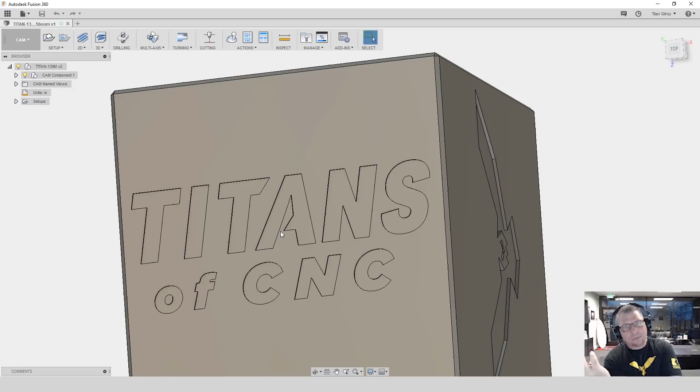So when I'm here, I'm gonna actually rotate exactly how I want it to rotate in the machine. I'm gonna flip it exactly how I wanna flip it in the machine, okay? I can talk about it, but let's just do it, okay? So first thing we're gonna do right here is we're gonna do a setup like anything else, okay?

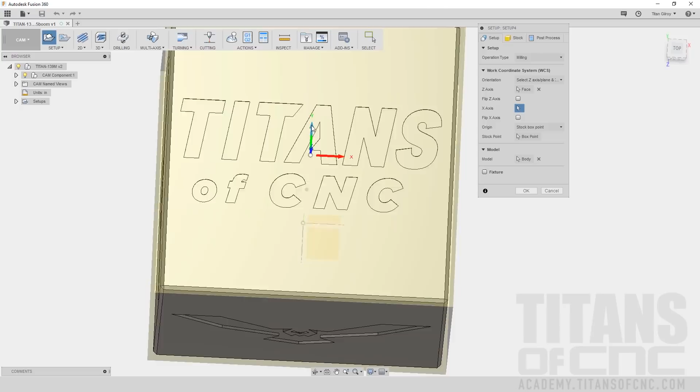So I'm gonna come up, I'm gonna actually set it up, I'm gonna come over, I'm going to say model orientation. I'm going to say Z and X. I'm going to hit Z. This is my surface. Hit that bad boy right there. Now X is already in the right direction. Y is in the right direction. So I'm good with that, okay? So I'm just going to leave that alone.

Actually, you know what? Maybe I'll just touch it, okay? So I'll say, okay, that's X right there. That's good. I'll flip this guy back around. And then I'm going to come back over here. I'm going to go model, box point, boom. It is absolutely in position already, so I'm already good. See that? Okay, so there's my X, Y, Z. That's where it's going to stay all the time.

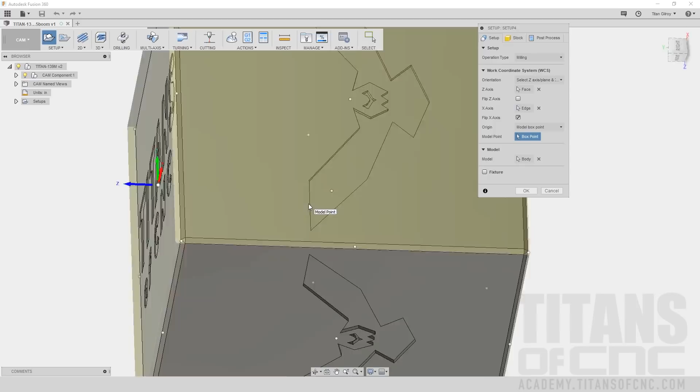And then when I flip it to do something else, I'm just going to tell it where the Z surface is changing. All right, so let me go back here. Now we're going to add the material. The material now is 3-inch diameter. So on a lot of 5-axis parts, a lot of people, they'll grab things with collets and grab them with chucks or 5-axis fixtures or something. So you can do square material, of course.

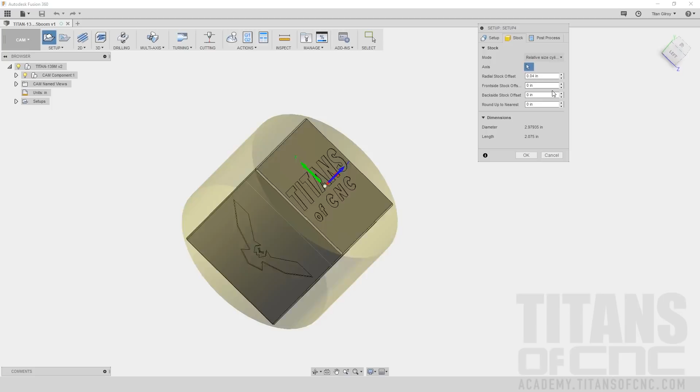On this one though, we actually designed it out of round material. And then we just pre-cut it for the bottom so we can grab it with that dovetail, okay? So I'm gonna come over here to stock. We're gonna go to relative size cylinder, boom. It automatically puts the cylinder on there, okay? So now I'm gonna say radial.

I'm looking at this diameter right here, right? And I'm almost there. And you have a little bit of extra material right here, right? A little bit of extra material right here, boom, boom. And when thinking about how much material that actually is, this is a .025 chamfer per the print, right? And so I can see that's 25. So if it's right there, I just have a little bit more, okay?

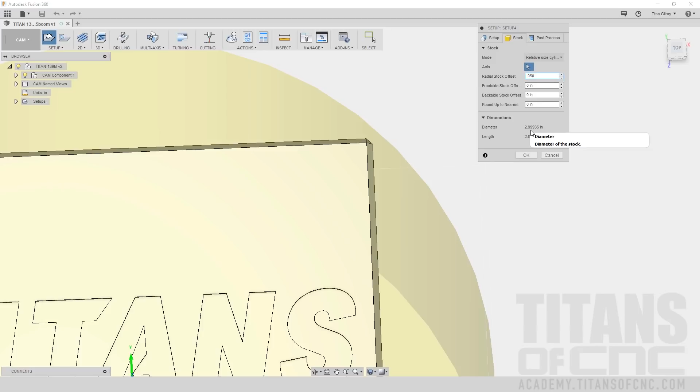So I'm actually going to go 0.050. Boom, and I'm pretty much right there. I'm actually gonna go over, so see right there? So I just went over 3 inches right there, so my material is absolutely perfect, all right? So on my front of it, when you flip it here, you can double check where your front is. If I put 0.05, you can see it go right there.

Like, I'll change it. I'll go 0.5. See how it just did that? All right, so I know I'm in the right place. So I'm just gonna say 0.05. You know, whether you have 5 or 100 thousandths, it doesn't matter too much. Actually, it matters because we're not gonna do a roughing pass. We're just gonna come back and clean it, okay?

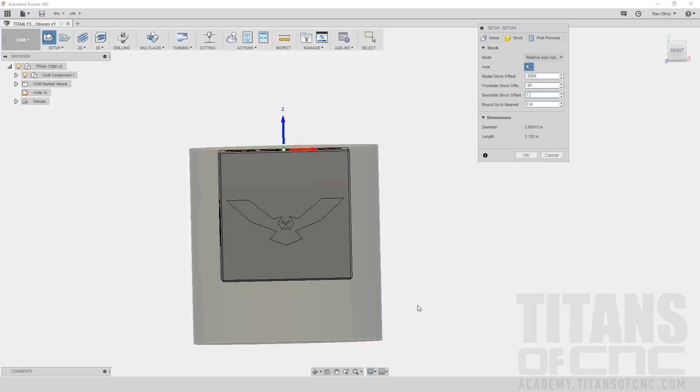So on the back side, I'm gonna give myself a lot of material. So I'm gonna actually go 1 inch back here because this is where I'm holding the part, and I wanna make sure that I have some clearance from the jaws that are holding it, so when I come down from the side, I don't hit anything, all right? So that all looks good. I like it. I'm gonna okay it. Boom. That's our setup right there.

Looks beautiful. Okay, so what's the first thing that we're gonna do? Just like any other part, we're gonna actually use a 3-inch Stellram, Kennametal Stellram. We're gonna just face it right across. We know that right here, this diameter is 3 inches, and the part is literally only 2.075 inches. So all we got to do is just come right across it, okay?

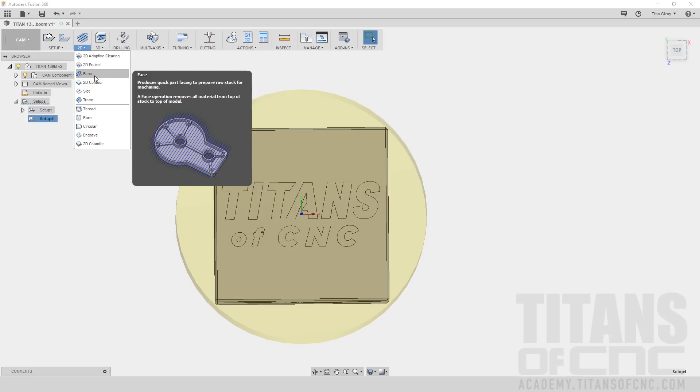So I'm going to come up here. I'm going to go 2D. I'm going to say face. I'm going to go select. I'm going to come down over here, and I'm going to go into my building blocks, tool list. I'm going to drop down. I'm going to grab my Stellram right there. I'm going to hit OK. Now we're on 5 axis. So before I was going really slow, but I'm going a little bit faster, okay?

So I'm actually going to run it, say 8,000, okay? So I'm going to go 8,000 RPMs. Boom. I'm going to say 60 inches a minute. All right. 60, 60, 60. I'm going to say 200 right here. Boom, all the way down. I'm going to come up here.

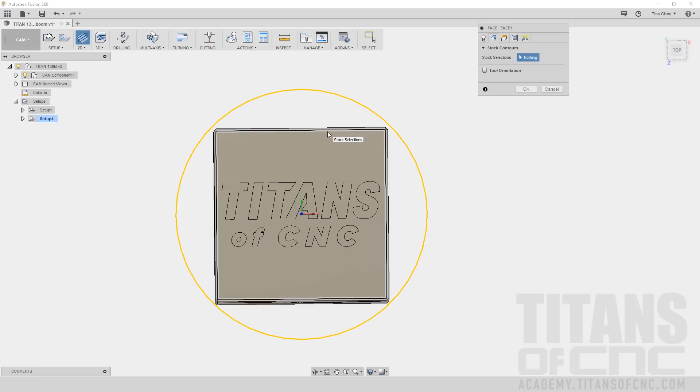I'm going to hit this guy, and it's telling me nothing because it knows this, but I'm actually going to change it because it's a 3-inch, and I don't want the 3-inch to come over here and come down and come across, trying to face all this material. So I'm going to actually just grab this guy right here, maybe the outside, and I'm going to say that's what I'm facing, all right? And then that'll be good. So then I'm going to come over here, and I'm going to say model top, we're good. Model top, 0 and 0.

That all looks good. Because we're a 5 axis, I think I want to practice getting away from the material a little bit. Okay, so on the clearance, let's go to 1 inch on these two right here, just to make sure that we keep away from the material. And we'll leave these alone. So I'm going to come back over here. That all looks good, but pass extension, we have like 1/2 inch material over here and 1/2 inch material over here, right? So I'm going to say 2.1.

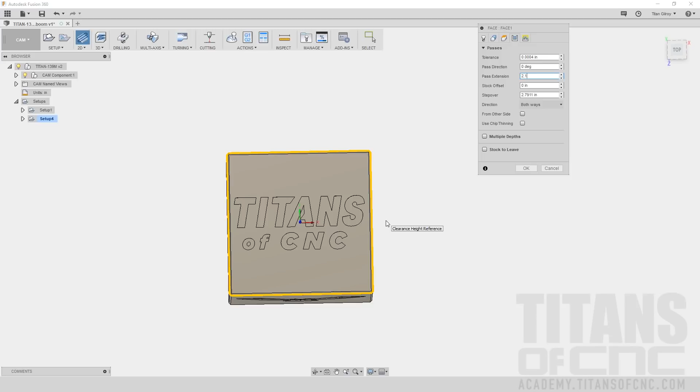Actually, I'm going to come back over here. I'm going to turn these guys off. I'm going to turn this off. Okay. And I'm going to say okay. Boom. All right. So if I turn my material on, like right here, and look at it, actually, let me just double check it. So I'm gonna drop down. I'm gonna simulate it. I'm gonna say okay. Boom. Now I can see I clearly come off the material. It leaves this a little bit, but it's only 50 thousandths, right? So see that little bit of stock right there? I'm not even gonna worry about it. All right.

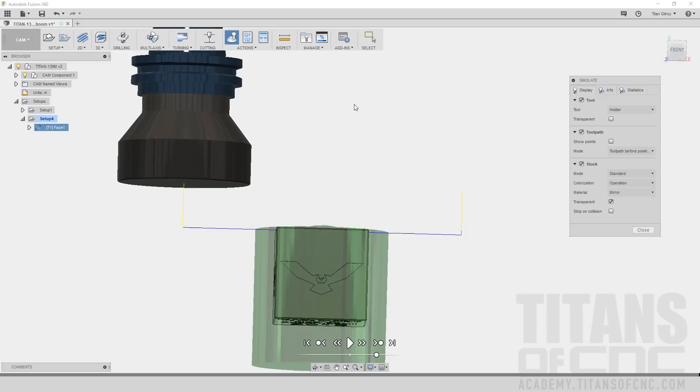And we're beautiful. One thing I'll say is I'm just weird like that. That is no problem, but I just like to start left to right. It's just what I like to do, okay? So I'm actually gonna come back in here. I'm gonna edit this guy. Boom. I'm gonna come back over here. Right here, it says degrees, pass. I'm gonna actually say 180. Boom. Then I'm going to say okay.

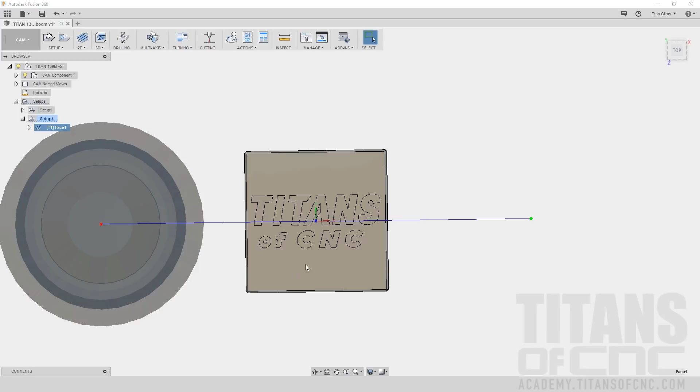All right, so the first pass is finished. It's going to drop down, come across, lift up, boom. Okay. I'm looking down at the spindle right here, straight down. Now I'm going to rotate this way. Rotate to my left. I'm going to come down. I'm going to drop down 90 degrees.

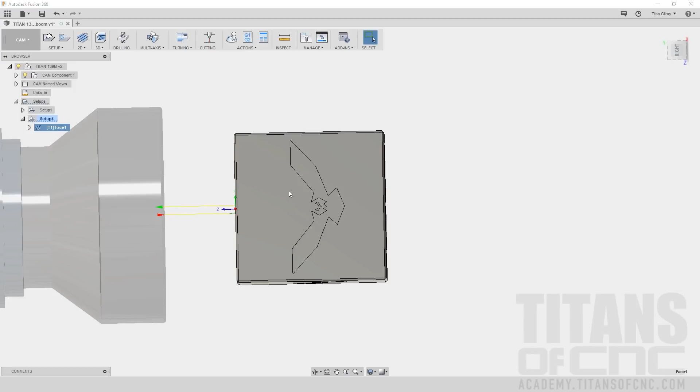Okay. Now, this face mill, if I just face it, it's going to center itself on this part. So I'm going to do something just a little bit different. I want to tell it exactly where to go and how to do it. If I hit face mill, it's going to center it, right? So what I'm going to do is I'm just going to use a contour, and I'm going to contour it, all right? But to contour it, I have to prepare it, okay?

So the first thing I'm going to do, because I'm on this side and I'm going to be flipping on this side, I'm going to actually sketch a line right here, okay? So I'm here, I'm flipping down. I'm just going to come up here. I'm going to go back to model. Okay. Now I'm just going to hit L for line. I'm going to hit this surface right here.

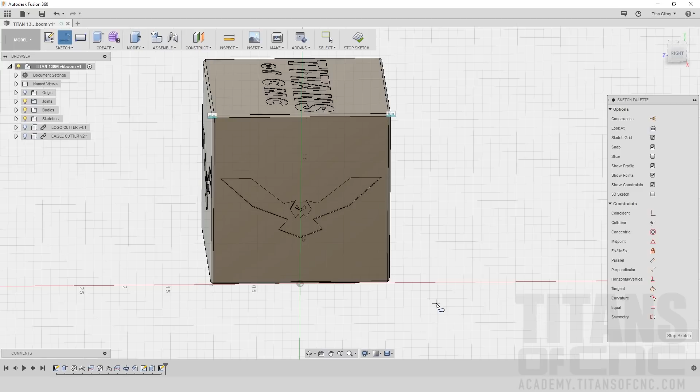Okay. I'm going to actually double check, make sure I know where I'm at, right? So I looked, that's where I'm at. So my line's going to be right here. Okay. So I'm just going to hit this guy again. Now I'm just going to come over here and I'm just going to stretch a line right there. Okay. Now I'm going to hit D for dimension. And then I'm going to take this guy here, this one, to this guy.

And since I have a 3-inch face mill and I want to have it come across the part, 1.5 would be the edge. I have a little bit extra material, so just to be safe, 1.8. Okay? And I'm just going to enter it. I'm already in D right here, so I'm going to hit this guy right here. I'm going to hit this guy. I'm going to come over here. I'm going to say 1.8. Enter. All right?

Now, I'm going to hit this guy. My tool is right here and it's facing across, okay? So I actually want this to be 200 thousandths right here. So I'm gonna hit here and then I'm gonna hit here. I'm gonna stretch it. I'm gonna say 0.2, all right? And I'm gonna enter it. Now, what did I do? I created a line to contour. So I, as the machinist, am dictating how I actually want to machine this part.

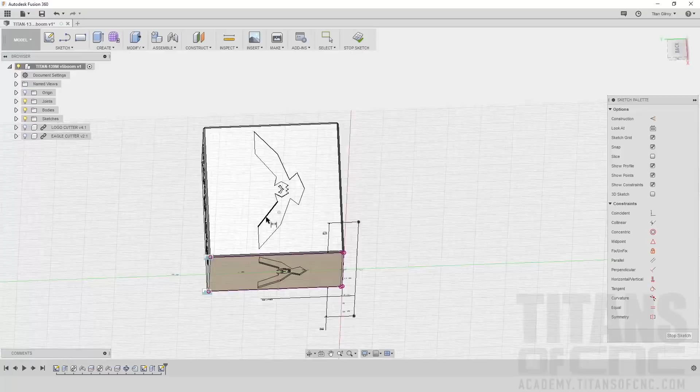Okay. So 200 thousandths right here, 1.8, 1.8 clearance. Everything looks good. And then I'm going to actually come over here now, and I'm going to do a line on this surface also. So I'm going to repeat the process, okay? So I'm going to say stop sketch. I'm going to come up here. I'm going to actually just hit line again, L. I'm going to actually hit this guy. Now I'm coming right across here, okay?

So I'm going to come back here. I'm going to actually come down here. All right. Now I'm going to hit D for dimension. I'm going to hit this guy right here, to here, to there. 1.8. Enter. Then I'm going to hit this guy over here, to here. 1.8. Enter. Then I'm going to hit this guy right here.

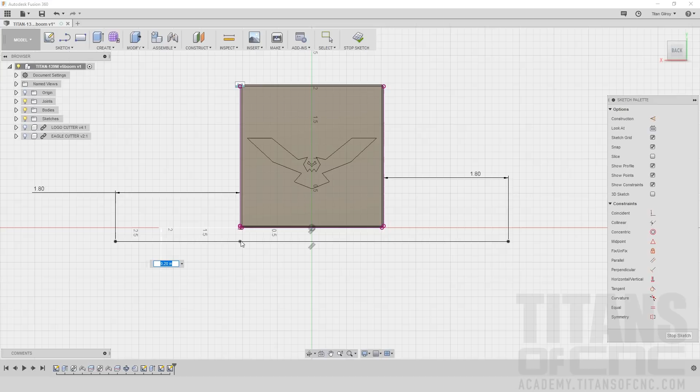It's already at 200 because it saw this over here. All right, so I'm just gonna hit OK. Right there. And that looks perfect. So now I'm gonna hit stop sketch. I'm going to come back up here. I'm going to hit CAM.

All right, this is red right here, right? Because I went out and I came back in. So all I have to do is right click over here. I have to say generate toolpath. And it fixes itself. All right. Now check this out. I got these two lines right here. Why did I only do 2 lines and I didn't do lines all the way over here? The reason is because I can use the same line. It just doesn't even matter. So when I'm here, I can actually use this line.

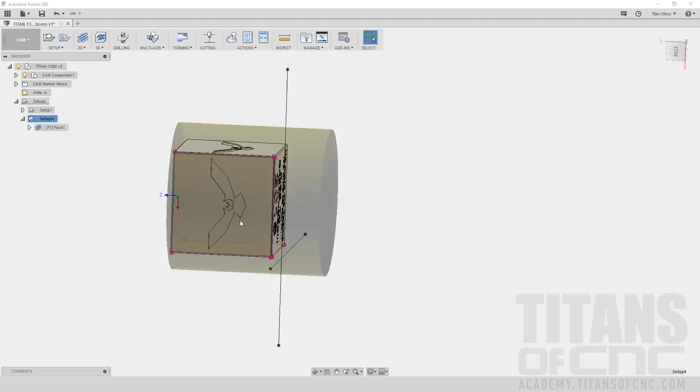I'm just going to say this is my surface. And when I flip over here, I'm going to use the same line because they're perfect to each other. Okay, this side, I just have to say what my Z surface is. That's just something really cool about working with solid models and working with Fusion 360. Makes it super easy.

All right, so now I'm here. I'm flipping down here. So I'm going to come up here. I'm going to go 2D contour. Boom. Now it already has my speeds and feeds right here. I'm just going to leave it alone. Okay. I'm going to come up here. Boom. This section is the most important section right here. It's the difference between 3-axis and 5-axis or 3+2, right?

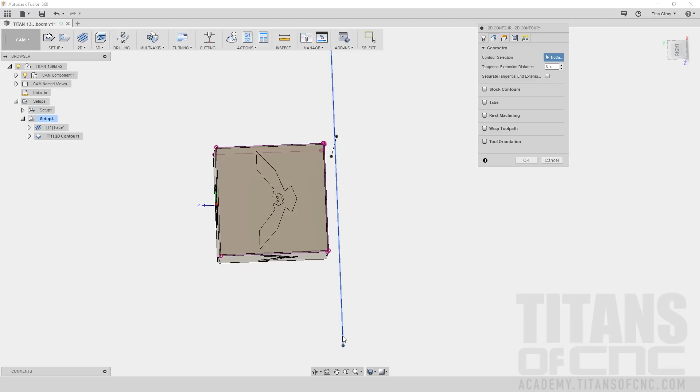Because now I'm going to select the line here. Boom. I'm going in the right direction, right? But you can see this is over here. That's kind of weird. So what do I have to do? I drop all the way down, tool orientation. That is the bad boy. That is what is going to set the machine in dynamic offsetting so the machine knows where to go.

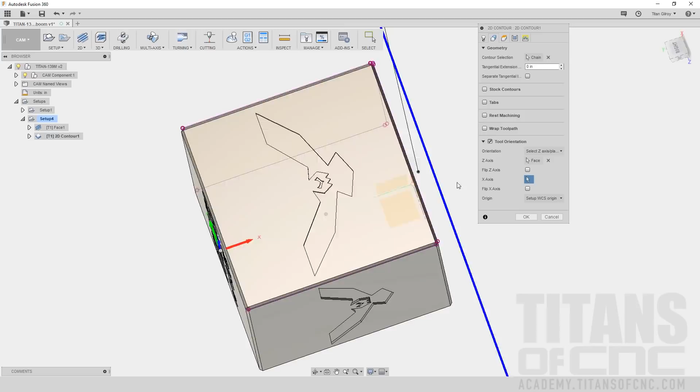Okay, so see this over here? You have to change this because now we're up here in X. Okay, so I'm going to hit this guy right here. And then I'm going to hit this guy. Boom. And it just changed. Okay, now X is still the same. X is going this way, Y is going that way, right? So I flip down, the 0 is still right there. X is positive that way, Y is positive, so it knows right where it's at. And when it posts, it's going to be perfect.

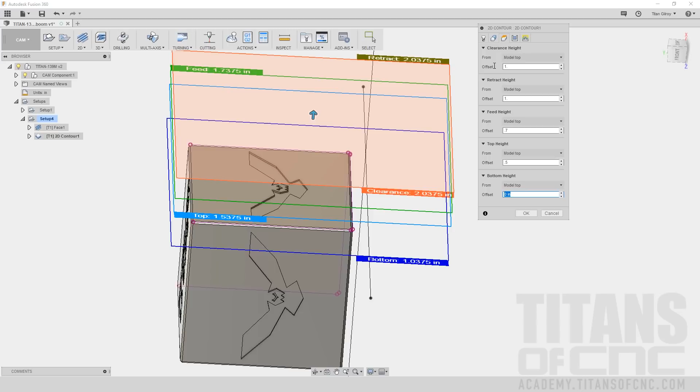All right, so now I'm going to come up here, click this guy. Now, we know that we have just less than 500 thousandths of material right here. So I'm going to actually do something. I'm going to come up here. I'm going to do 1 inch. I'm going to do 1 inch. Now right here, I'm going to actually change this, right? I'm going to say 0.7 right here, feeding. Model top, I'm going to say 0.5 for that material. Then I'm going to keep this at 0. It's going to actually make the cuts right here.

Okay, so I'm going to come over here. I'm going to leave it left in computer. I'm just going to leave it at 60 right there. I'm going to come down. I'm going to hit multiple depths. Boom. Maximum roughing, I'm going to go 0.1. I'm going to hit this guy right here. Finish step downs 1. Finish step down 0.005. And then I'm going to come up here. It says repeat finish, finish feed rate, multiple finish passes. I'm going to leave all that alone. I'm doing a finish pass right here.

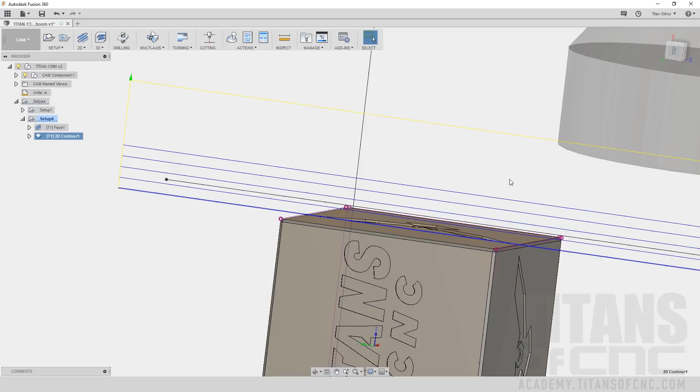I'm going to come up here. I'm dropping down outside the material. So all this doesn't even matter too much. So I'm just going to say, okay, I'm going to hit that guy. I'm going to hit that guy. I'm going to hit this guy. Boom. Check it out. So my feed rate is nice and slow. If I was actually doing this as a real part, I would speed these guys up. I'd have everything going fast, like a couple 100 inches a minute or even more. And then on my finish, I would have went just slow over here, but I'm just leaving it all at 60 inches a minute.

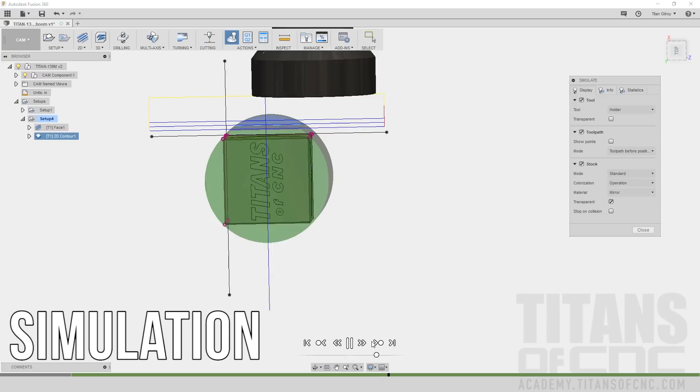All right. So that looks beautiful right there. You guys want to see it? Okay, let's come over here. Let's come up here. I'm going to drop down. I'm going to simulate. I'm going to hit OK. You can see it going. Boom. Boom. Boom. Looks perfect. Let's take my time.

Now, I made that line. See how the tool is offset? See that? It's offset to the side. It's 200 thousandths right here because I know my vise is over here and I want to keep my tool away from my vise, and it has a 30 thousandths little corner radius right there. So basically I determined as a programmer that I wanted to keep it 200 thousandths off the part, and you can see this huge amount over here. So over here is 200 thousandths, but over here there's a big gap. All right, so it's doing exactly what I wanted to do.

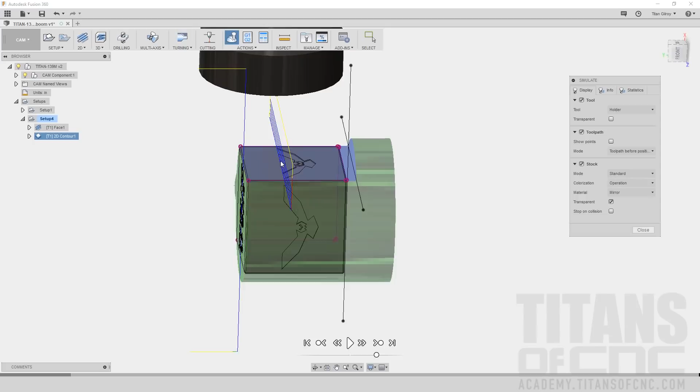And you see the tool path is offset off center. Okay, so that looks perfect. Now we just need to duplicate it. All right, and how I do it right now matters. Okay, so what I'm going to do is I'm going to close this.

I'm going to right click here. I need to do it 3 more times. Okay, so I'm going to hit duplicate. Boom. I'm going to right click again. I'm going to say duplicate. Boom. Now I'm going to right click again. I'm going to say duplicate. Boom. So they're all doing the same thing, but now which way do I want to rotate?

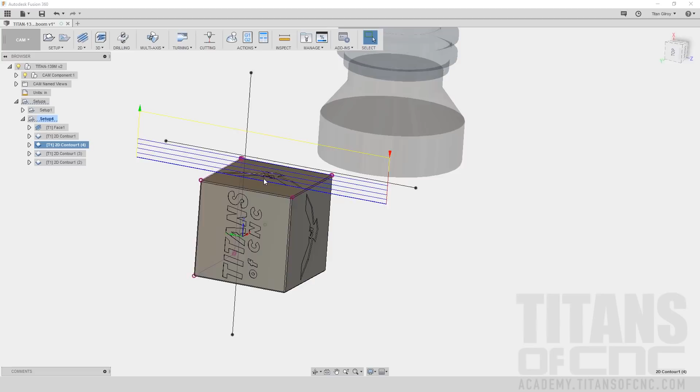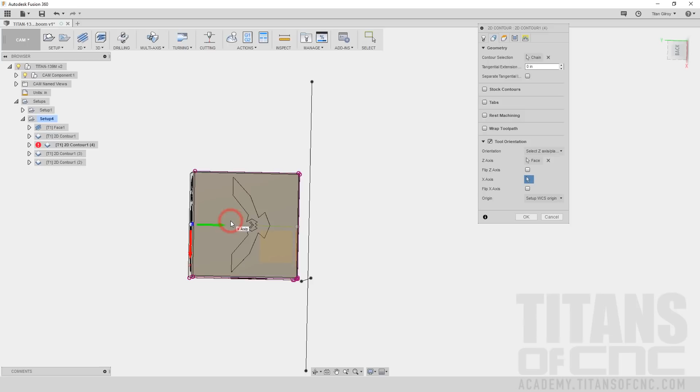So I think I'm going to actually rotate this way. Okay. So we're here. I'm going to flip this way. That's my next one. Okay. So second one, I'm going to right click, I'm going to edit. Now watch this. I'm going to come over here. Boom. Now I'm going to X out here. I'm going to pick this guy right here. Now that's Z surface, but look, my Y's off.

So then on my X, I'm going to hit this guy. Come in, show you guys. Boom. Now X is in the positive direction. All right, makes sense? Now this looks good, everything looks good. Now I'm going to click this guy. So here, I'm going to click this one. Boom. It knows where it's at. I click that guy right there. Now I'm going to come over here. It's all exactly the same, so I'm just going to hit OK. Boom. And it does it.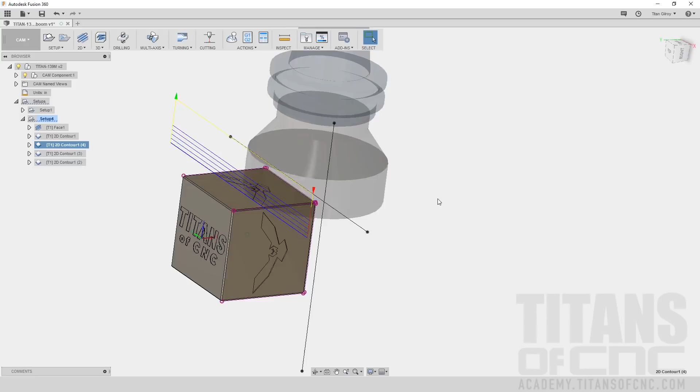Now, the next one has to be this one. Boom. So I'm actually going to edit this. Okay. I'm going to come in here. Boom. I'm going to get rid of this. I'm going to hit this. All right. I'm going to get rid of this. I'm going to actually hit this. And it's opposite. So I'm going to click this little arrow right here. Boom. Now I'm going to OK it. Now it's going to do it. Okay, so let me just double check it. So it goes from here to here to here.

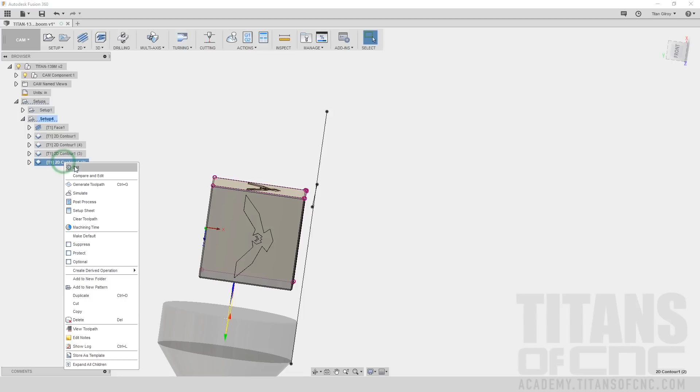Now I want this side. So I'm just going to change it here. Edit. Okay. Come back over here. Now my chain has to be here. Now my face needs to be here. This is in the wrong direction, so I'm going to actually X. I'm going to come over here. Boom. Double check this. X is correct. Z is correct. Y is correct. All right. And I'm going to change this guy right here.

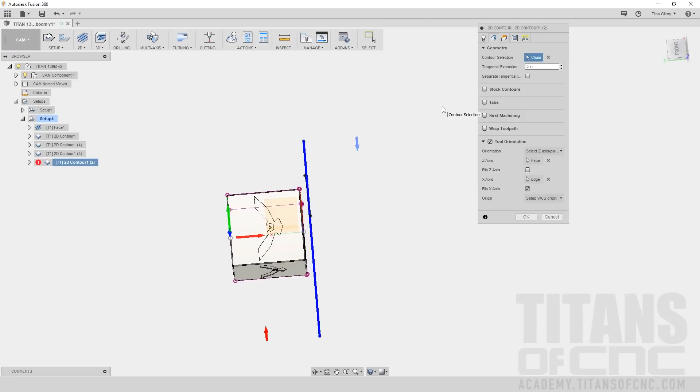Click this guy. Boom. Now I'm going to click this guy. Boom. All right, so now let's look at it this way. Face, boom, boom, boom, boom. See it? And that is perfect. All right, so one tool, our face mill, just rocked it all the way around. Guess what? We're only doing 2 tools.

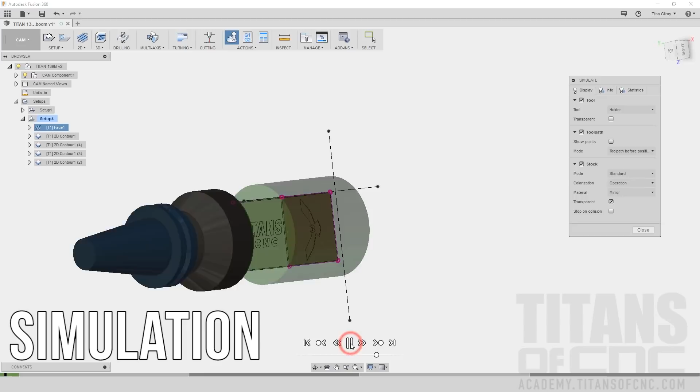All right, so I'm going to show you that tool real quick. So we're going to right click it. I'm going to drop down. I'm going to simulate. Boom. Say OK. I'm going to look at my material. I'm going to actually get rid of transparent. I'll speed it up. Just making sure that everything looks good. All right, so that's how our part looks right now. Okay, pretty cool, pretty awesome. All right, so now I'm going to actually close this out. All right, so the part looks absolutely perfect. We walked all the way around it.

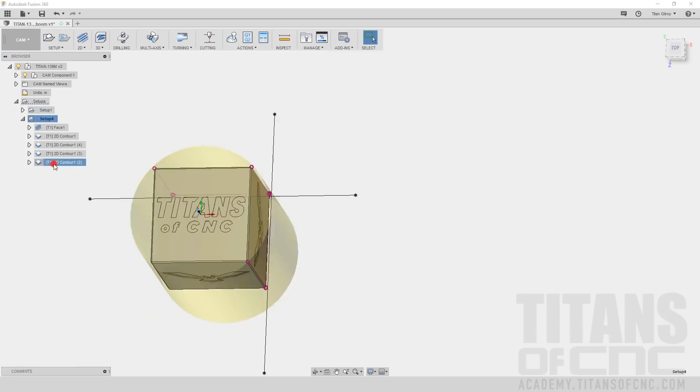Our first tool was a Kennametal steel ram, a beast of a tool, and it basically just cleaned everything up around it. Now we're gonna do the intricate work. We're gonna actually do the engraving and the chamfers. And when we do the chamfers, I'm gonna teach you something pretty cool. So on the first tool, I literally showed you how to keep changing your Z so that it always knows where the spindle is, right? And it's just gonna keep orientating itself, meaning the 5-axis trunnion is going to move depending on where you say the Z is.

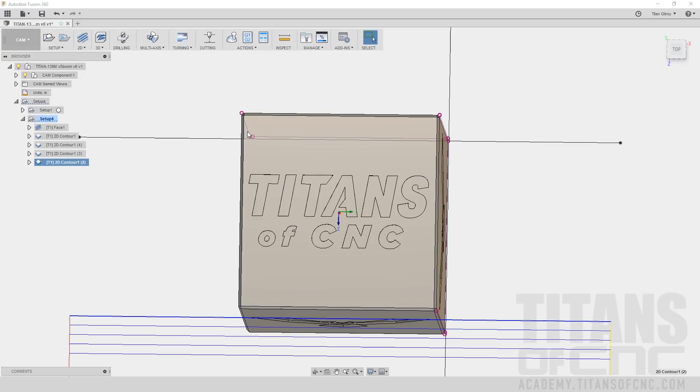So on the next tool, I'm gonna teach you a high-end cool little trick. So we're going to engrave it. We're gonna chamfer around here, right? That's gonna be step 1. Then we're gonna flip it on its side. We're gonna chamfer just here, and then we're gonna engrave here, and then we're gonna copy and basically do it 4 times, going around the outside of the part, finishing the part in record time, fast and efficient, because that's the name of the game. All right, enough talk. Let's get to some action. So the very next thing we're gonna do is we're going to engrave this guy right here.

So I'm gonna actually double check something. All right, so I'm gonna actually come up here. I like to turn things off and on to double check tool paths and stuff, and that's why I kind of dropped it down, but you'll see how I do it in a little bit.

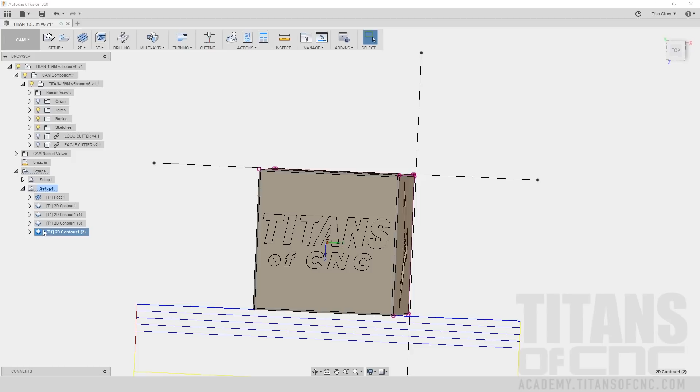Okay, so first thing I'm gonna do right now is I'm gonna come up, I'm gonna go to trace. So I'm gonna hit trace, I'm gonna come up here, I'm gonna go to Titan building blocks, go off the Titan building block kit, right? The Academy kit. And when I come up here, I see a 1/4 inch chamfer. I'm gonna actually use that to engrave and chamfer. Same tool, multi-purpose. I'm gonna hit that bad boy.

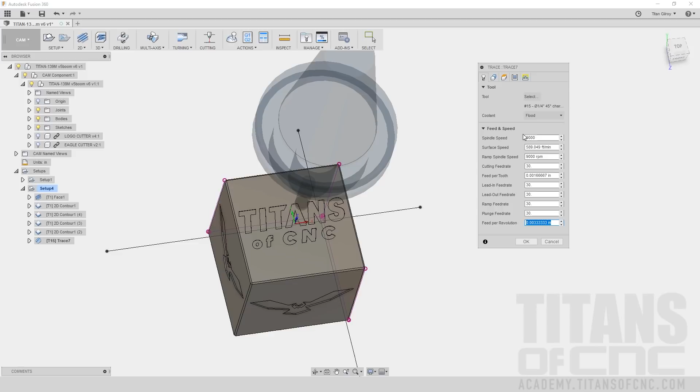I'm gonna come up here to 9,000. It's gonna go nice and slow. I'm just gonna do 1 pass because I wanna make it nice and simple. You guys can double up your passes, do finish passes. You can speed up the roughing, slow it down. Engraving, with this tool, is not something you want to speed through. So I'm just going to keep it nice and slow. All right, so 9,000, all the way down.

I'm going to come up here. We're going to select our text. Okay, so I'm going to get nice and close to make sure that I don't hit the bottom and I only hit the top. All right, so I'm going to come up here. I'm gonna hit this guy. Oh, right there, all right. So then I'm gonna hit this guy. I'm gonna come in, zoom in, hit that guy, hit this guy. See how it's kind of like right there, you gotta be careful. So just get in there.

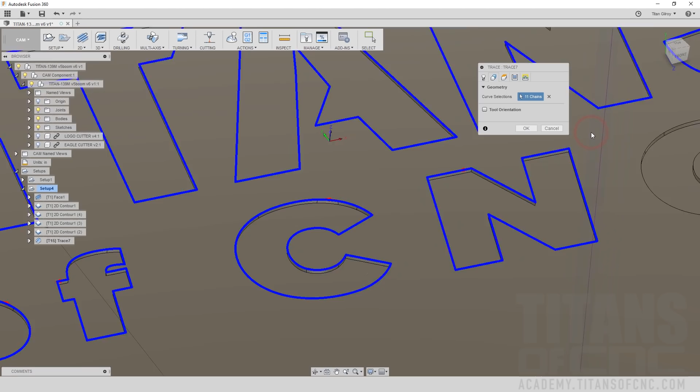All right, so I got all my lines, I got my circles. You wanna just double check and make sure that you have absolutely everything done. All right, so now everything's good. I'm gonna go to tool orientation. All right, automatically I can see that my Z is off, so then I just hit Z, right there. Y is perfect, X is perfect, everything looks good. I'm gonna come over here, just gonna go 1 inch, 0.1, and then right here, I'm gonna actually say 0, model top, this has to be model top. Right here, I'm gonna go model top.

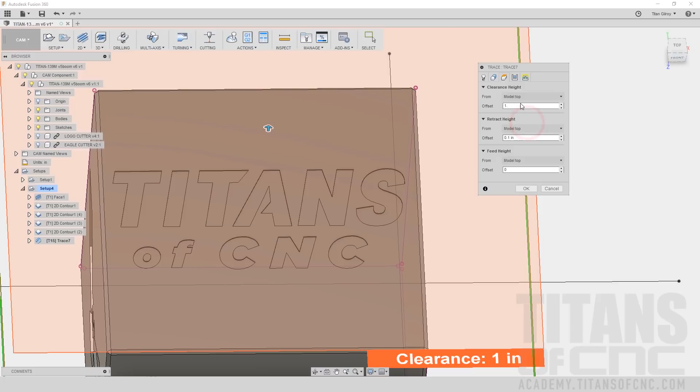So 1.10, I'm gonna actually come over here, okay? And I'm gonna drop down, center, center, axial depth. I'm tracing, so I actually wanna drop axial, my Z, down into the part. So I'm going negative 0.010, okay? I'm gonna get rid of my chamfer because it doesn't matter. These all look good. I'm gonna okay it.

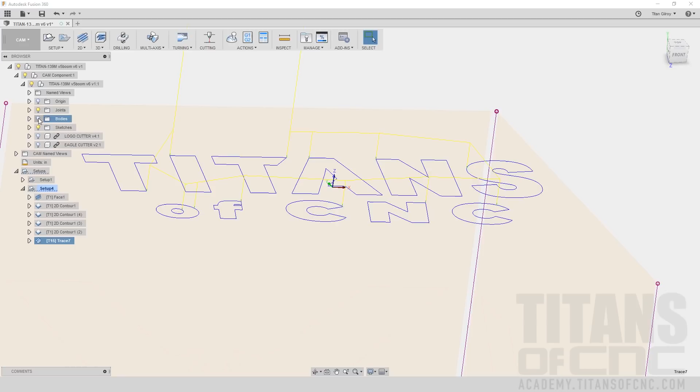All right, so that looks good to me, but I have to double check and make sure everything's good. So watch, I'm gonna come over here. I'm gonna actually turn this off and I can see it, okay? So I read it, Titans of CNC. Looks good. Turn it back on. Nice.

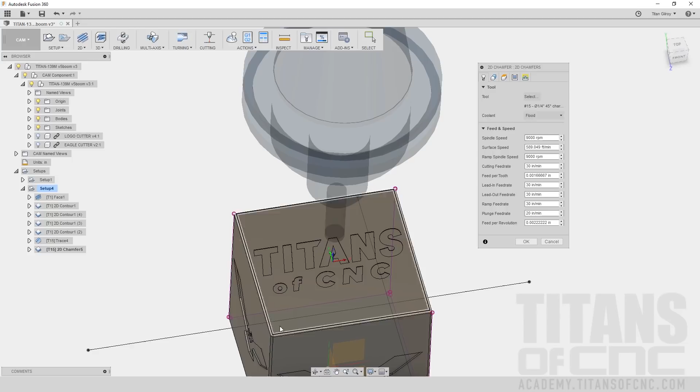Looks really good. Okay, so next thing we're going to do is we're going to actually chamfer around the outside. So I'm going to come up here. I'm going to actually do the same thing, but I'm going to drop all the way down to 2D chamfer. I'm going to stay with the same tool, basically the same RPMs. Click this, 30, 30. This is very slow, but it's okay. I'm not doing a finish pass on this, so you guys can actually run this at 100, 200 inches a minute, come back at maybe 50 and just do a finish pass on the chamfer. I'm just going to do 30 and it will be good.

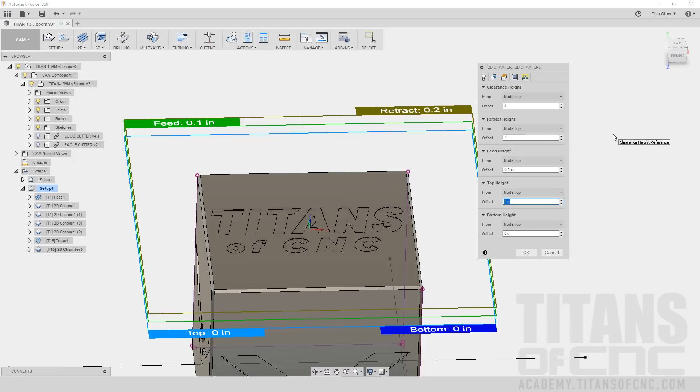All right. On this guy, I'm just going to speed this guy up. So 100. All right. So now I come back up here. We're already where we want to be as far as tool orientation goes. I'm going to hit this guy right here to actually contour that. I'm on the inside of the chamfer. Okay. I'm going to come up here. I'm going to go 4 inches. Then retract height, I'm going to actually come up to, say, 0.2. Feed height, 0.1. Model top, 0. And then keep this at 0.

I'm going to come back over here now. And I'm going to just tab down. Chamfer width, I'm actually going to say 0 because I'm on the inside of the line. So if I say 0, it'll go off the inside, and because it's at a 45, it'll automatically just drop down.

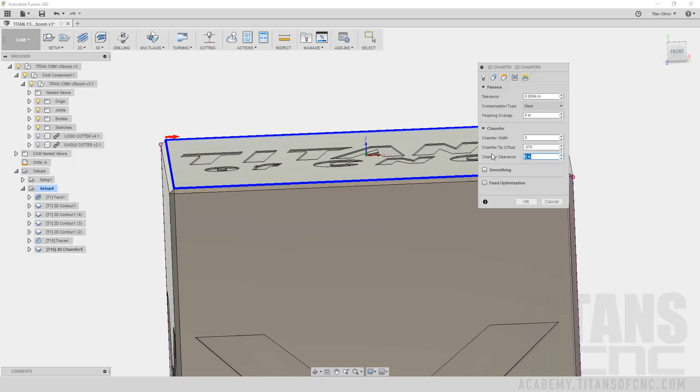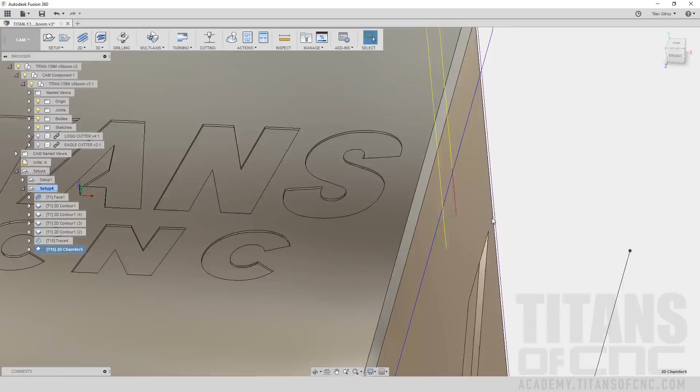All right, so I like starting on corners. I do not like starting over here, okay? Because you can leave a line. Even though I'm coming in at a radius and coming out radially, I might have a little line right there. So just make it beautiful, and to hide it, I'm gonna actually come back in here. I'm gonna right click it. I'm gonna say edit. I'm gonna come back over here to the last one.

It says entry position. I'm looking right here, right? So I'm gonna say entry position is literally right here. And then I'm gonna say okay. And now look, it basically comes right in, right there. Comes around right on the corner. All right, so that will work.

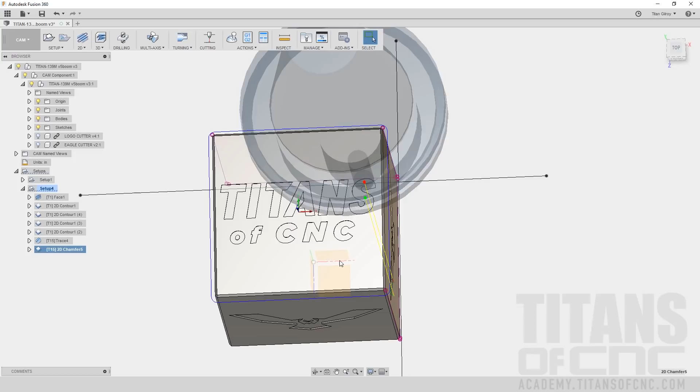All right, so now that I have this top and I have this guy, now we're coming to one of the cool things that we're gonna do. First thing I gotta do is flip it this way and use the same tool. So now when I look at all my chamfers, I'm doing this side, this side, this side, this side, and basically I'm chamfering this. There's stock material down here, right? And we have that 200 thousandths gap, so I don't have to worry about these guys right now. If I wanted to, I could undercut and do them, but that's not my intention. So I just have to basically hit this guy.

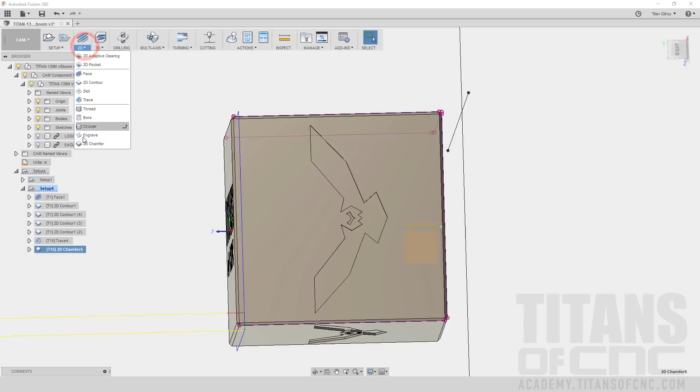So first thing I'm going to do is chamfer this edge right here, just one time. And then I'm going to engrave the eagle. So first I'm going to chamfer this guy. I'm going to come back up here, drop down. I could have copied it, or duplicated it, but I'm just going to grab that guy. Got everything dialed in right here. I'm going to come over here and hit this line right here. And I can see that my tool orientation is off.

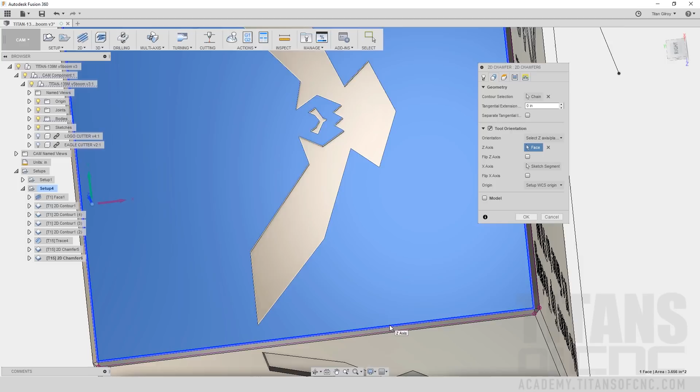So I'm going to come over here. I'm going to say that my Z surface is here. And then I'm going to look over here. Y is right where I want it. X is right where I want it. All that is perfect. Okay, so now all I want is this surface, so I'm just going to hit this one more time. All right, so now I'm going to come back up here, contour selection. I'm going to go back, hit this guy right here, and hit it one more time.

Okay, now I want to break the chain, so I'm going to come over here and break it. I'm going to open up that contour, look at it, and it's exactly what I want. So I'm going to OK that. All right, now I'm going to come up here and actually hit this guy. And now it's going in the right direction. So that looks good. This guy right here looks good.

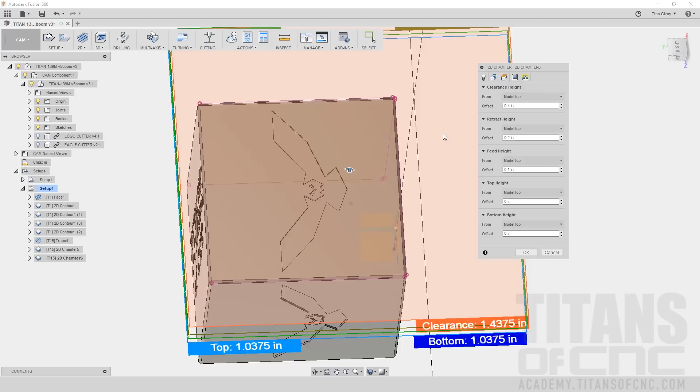Now I'm going to pop back up here. I'm flipping around, so I'm actually going to raise this guy. So I'm going to go 0.4 inches. I'm going to drop down. Retract height, I'm going to say 0.2 inches. Feed height, I'm going to say 0.1. That's fine. I'm going to go 0 right here, and 0 right here. Okay. So then I'm going to come over here and come down. This guy is already going to be at 0. I'm going to put 0.75 just like the other one.

And we're looking good. So now when you look at this distance right here, and you look at this distance, I actually want to overhang it just a little bit. There's a lot of material right here, like 200 thousandths off, right? We have that little gap, so I got to be very careful, okay?

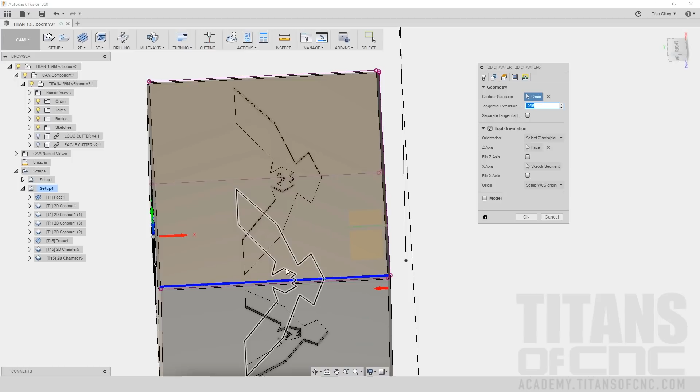So I'm going to do something a little different, and I'm going to go back over here and see this extension. I know that this is 25 thousandths, so I'm just going to go 0.035. And that's going to actually extend me by that much, by 35 on both sides. Okay, so I went back, popped that guy in. If you look at that picture, watch, you can actually see it down here actually extending.

So now I'm going to actually go over here. I'm going to say 0 right here. I'm going to say 90 right here. And I'm going to say 0.075 here. Boom, boom. So that looks good. I'm gonna say okay. All right, so that's my toolpath right there.

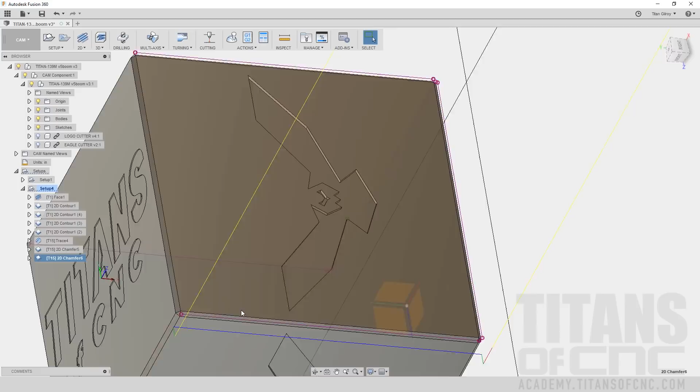It drops down and it just walks right in. All right, so I know my speeds and feeds are correct. And if you look at it, you can see that it's 35 thousandths that it extended it right there. See it right there? Boom. Okay, so now I got that guy right there. So that's this one. Now I'm going to go back and I'm going to actually trace this guy.

So I'm going to actually come back up. I could duplicate, but I'm just going to come back up. I'm going to come down to trace. Boom. And then I'm going to come over here. I'm at 9,000. I'm at 30. I'm just going to leave it alone, leave it alone. I'm going to come down over here. I'm just going to go 20s just so I go nice and slow right into right there.

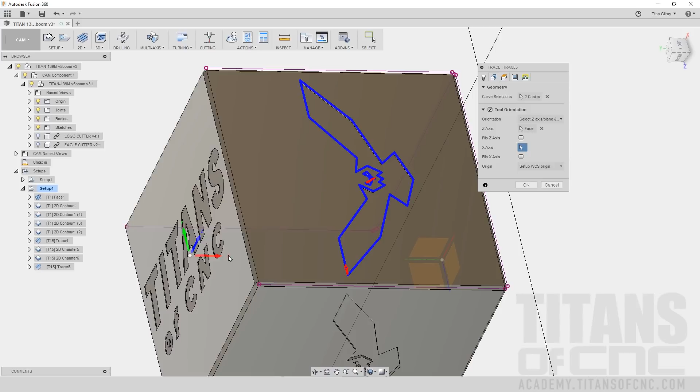I'm going to come back actually up here. Boom. And I'm going to select this guy. Make sure I'm on the top. I'm going to select this guy. All right. And then I'm going to do my tool orientation. I'm going to back up. I'm going to double check my tool orientation. So now it's asking me for Z, so I'm going to hit Z here. And then my Y is there, my X is here, my Z is up here. So that looks good.

This is like one of the most important things. You just got to always keep looking right here and making sure that you're oriented correctly. All right. So now we're going to come back up over here. Clearance height, I'm going to go 4 inches. Model top. I'm going to go over here. I'm going to go model top. I'm going to go 0.1. Then I'm going to come down here. I'm going to go model top. We're going to keep it at Z0.

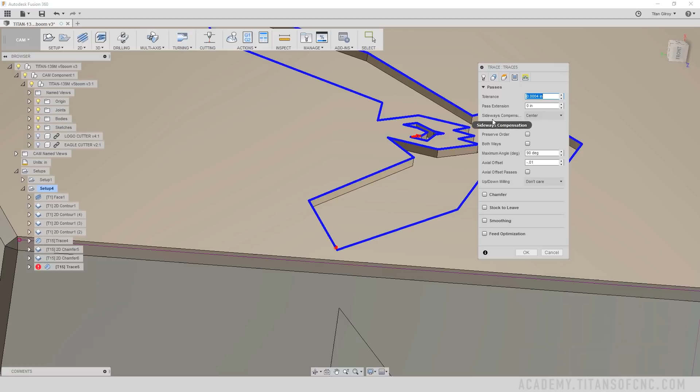Okay. Then we're going to come up here. We're going to actually drop down. Boom. Center. Center. Axial. How deep do we want to go? We're actually going to go 10 thousandths right here. I'm going to drop it down. Boom, boom, boom. Everything looks good. Now I'm going to actually come up here. I'm going to say OK. And check it out. So you can see it right around there. I can actually come up here, turn the body off, turn it on. Beautiful. All right. So now I got this guy and I got this guy.

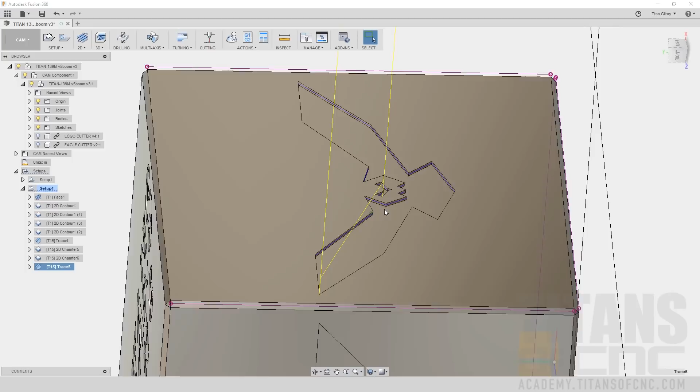And I told you guys we're going to do something pretty trick, right? So check this out. So I just did it one time here. I did it one time here. You guys have seen me duplicate different cutting paths, right? Contours and different things where we've duplicated it, went in, edited it, and actually saved a bunch of time. So right now we're going to do something very similar because all these edges, all these sides are 100% perfect and exact.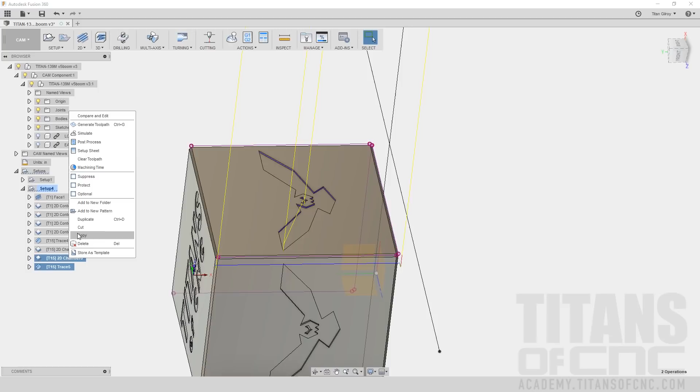So now I'm going to actually hit Control and I'm actually clicking this guy also. Now I'm going to let go. I got both of them clicked right here, right? Now my mouse, I'm going to right click. I'm going to actually come up and see this right here. Boom. Add new pattern. I'm going to hit this guy. I'm going to come up. Okay, so my zero's here, I'm going in a circular pattern. So I'm going to actually come up here, drop down circular.

Now your axis that you're rotating on. So this guy is going in a circle. Your axis, I come in. See this guy right here? That green, that's what I want. So I'm going to actually push away. It's going to get bigger. See that? So I'm going to click that. Boom. See that? Now you got it. Okay? So make sure that that's perfect for my rotation.

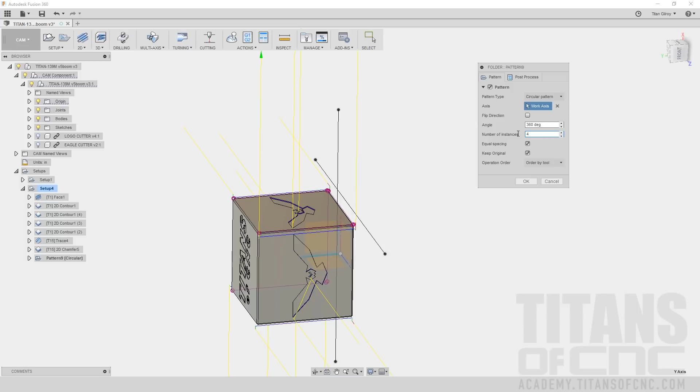360. How many times? I want to do it 4 times. Boom. Boom. Boom. I'm going to actually just do preserve order, just like that guy. And I'm going to come down. I'm going to OK it. Oh, and look, both of them turned into one. So there was 2 tool paths. Now it's just this one pattern.

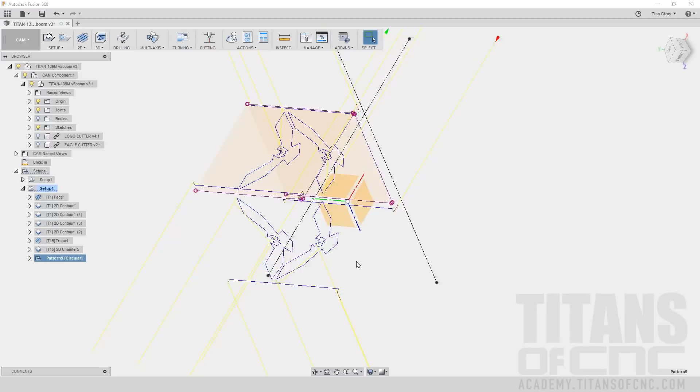And if I click on it and I actually get rid of my body up here, boom, you can see, boom, boom, boom, boom. And you can see all of the eagles. See that? Woohoo! Trick right there, right? So I just saved some time. So now my tree, all my cutting paths and stuff is not that long because I did some duplicates, right? So especially right there.

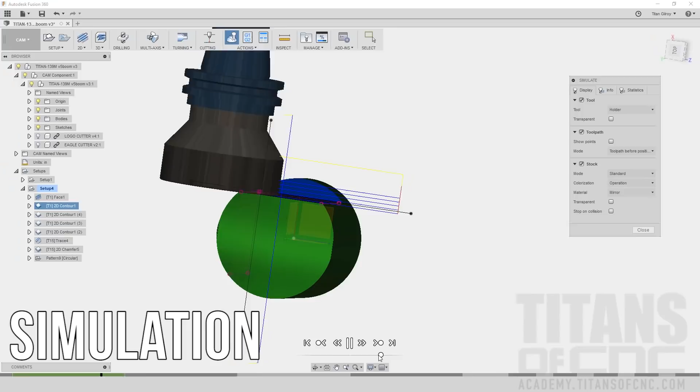All right, so I'm going to come back up here. I'm going to turn this guy back on. Now I'm going to come over here. I'm going to turn that guy on. I'm going to right click. I'm going to drop down and simulate it. Boom. I'm going to speed it up. Looking good, looking good, looking good. Facing it. You got to take the time to simulate it. You got to watch your tool. You got to make sure that everything is absolutely perfect. All right? Double check it.

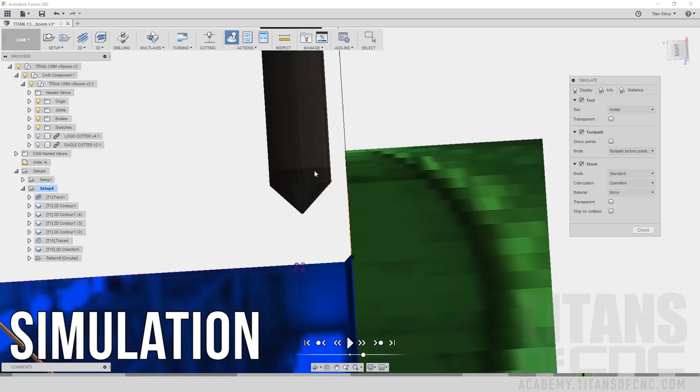I'm going to slow it down over here because I want to watch it. So I'm going to OK it. See it coming down right now? It's coming down nice and slow. I'm going to stop it. I'm going to come in. I'm going to look at my tool, right? I'm going to look at my material and I'm going to see where it touches. And I'm just going to hit this guy. Boom.

Now let me speed it up. It's going around. Oh, check it out. Boom. Looks beautiful, looks perfect. There's a lot of different lines going on, but that is exactly what I wanted. All right. One thing that I noticed was when I was actually coming across and cutting all these guys, just because of safety reasons and because it's just a smart thing to do, you got to have a lot of clearance here. You got to make sure you got a lot of clearance.

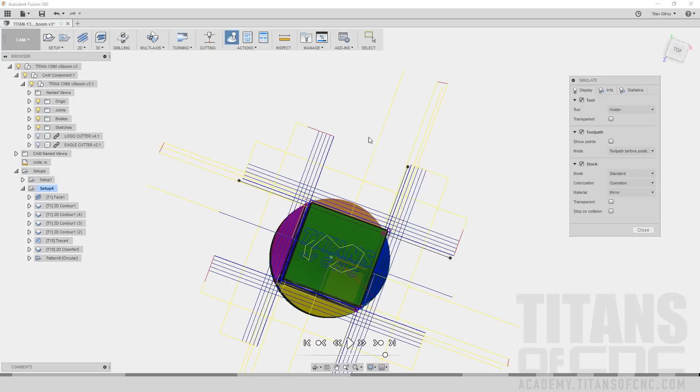So let me go back and see what I did. So I'm going to close this out. Actually, I'm going to come here first. I'm going to actually come into edit. I'm going to come back over here because it's extremely important. Okay. On my clearance height for model, I'm going to say 5 inches. Depending on your trunnion or your 5-axis, you guys do what you want to do, but make sure that you get out of there before you rotate. Okay, get up and away from your part. Okay, so I'm just going to okay that guy.

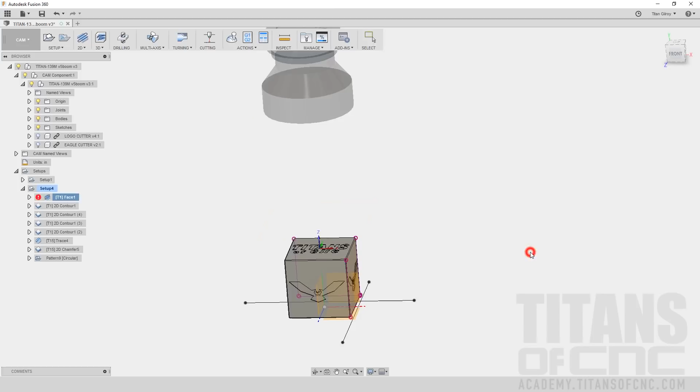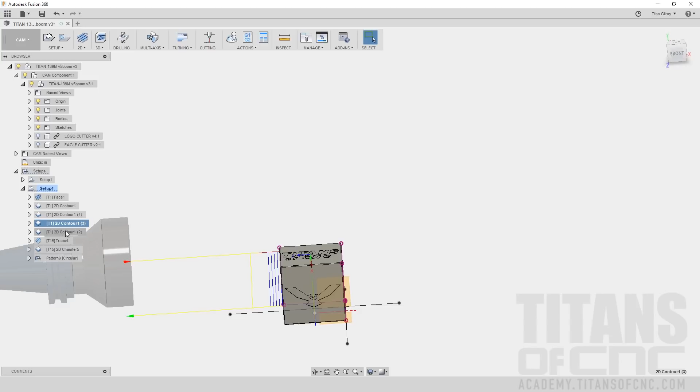Now I'm going to come over here and I'm going to actually right click here. I'm going to edit this guy and I'm just going to go through each one. So I'm going to come over here. I'm going to go 5 point. Okay. Boom. All right. Now I'm going to come back over here. Same thing. I'm just going to go right through it. 5 point on all these 4 right here. Come back over here. 5 point. Okay. Come over here. Five point. Okay. Come over here. Five point. Okay.

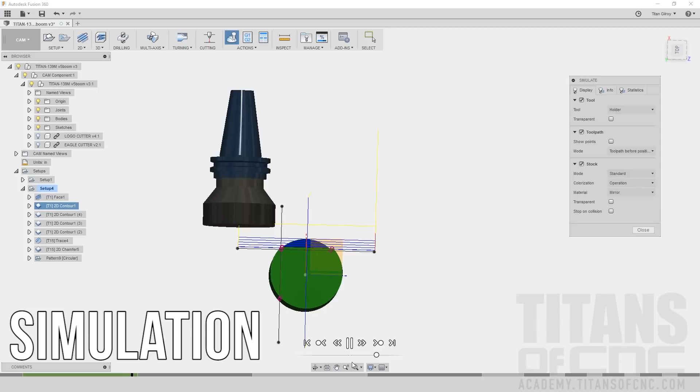Boom. Looks good, huh? So now I'm going to come back up here because I made changes. I'm going to look at it. I'm going to drop down. I'm going to simulate it. Say okay. So it's only raising it here to come back over here, but when it rotates, it will raise all the way up. Boom, see that? So it's coming over here, that's like 1 inch, coming down, but before it rotates, it comes all the way up. All right, so that's just a safety feature, and I want to make sure that we do not take any chances with this part.

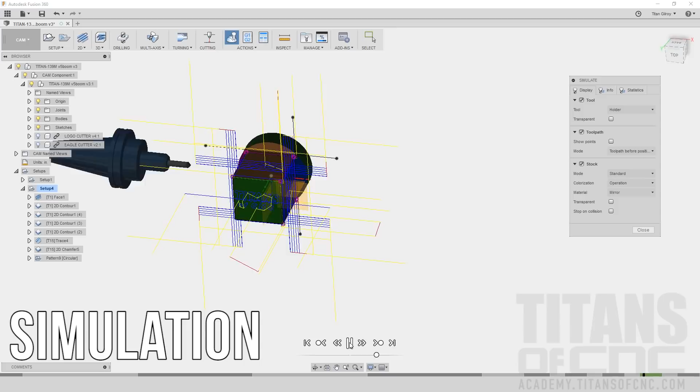All right, so I'm excited. Watching it. All right, boom. Look at that. Oh, love it, love it. So I'm going to close this guy out. We are 100% done. Right there, you have the Titan-138M. 5 axes, baby, 5 axes. We're taking you to greatness. Oh, check out the back. Boom, no more tiptoeing. It's time to run. We're rising to greatness in 2018. We're out. That's our first 5-axis tutorial.